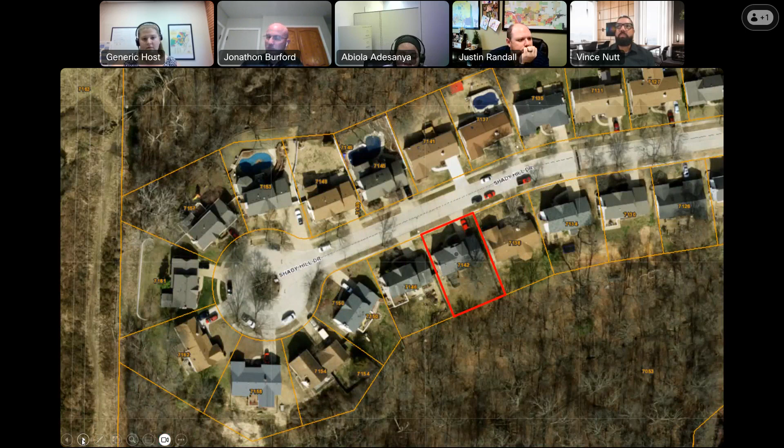Jeremy, please state your first and last name for the record, and then feel free to present to the board. Good afternoon, everyone. My name is Jeremy Durham. Thank you for the opportunity to present today. So you can see an overhead aerial view of my house. It doesn't give you a tremendous view of what's going on, but we're requesting this variance because we're trying to do a more permanent fix to a considerable amount of erosion damage that has happened.

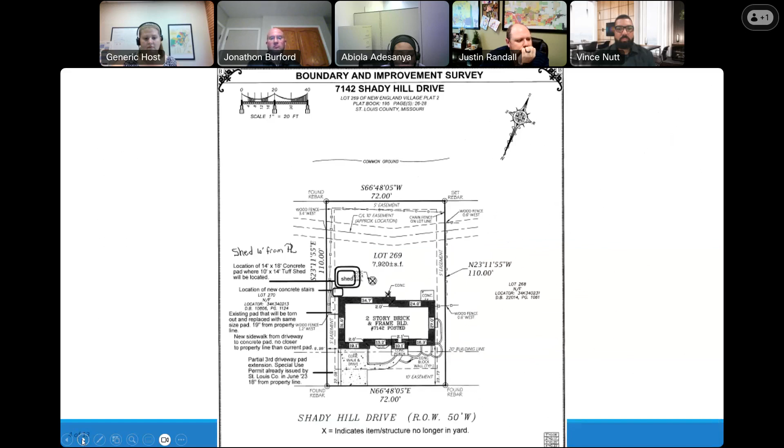I'm under the impression that you have been given copies of the photographs I submitted with all of the erosion damage, and our temporary attempt at fixes with the keystone wall. The concrete slab that currently sits on the side of our house has 5 inches of drop and has started sliding to the back of the house.

So that is all going to be replaced with a same size shed, same size pad. Off of that pad, instead of the wooden steps that you can see the remnants of what is left from the erosion, we're going to be doing poured concrete steps. So there will be a footing poured around the perimeter of the steps, which will come down the edge of the foundation.

There will be a roughly 5.5 by 5.5 foot landing at the top of those steps that will join with that concrete slab you're seeing right now—the new one, obviously not that one, because that's going to get torn out and replaced. It will all be compact with rebar and gravel to pour the steps. And you can see a good shot there of all of our attempts to try and stave off that erosion.

Really, it's kind of cut and dried. It's become dangerous for us to even enter our backyard from that side, and we're just looking to do a more permanent, albeit very expensive, fix to remedy this 19 years worth of erosion damage.

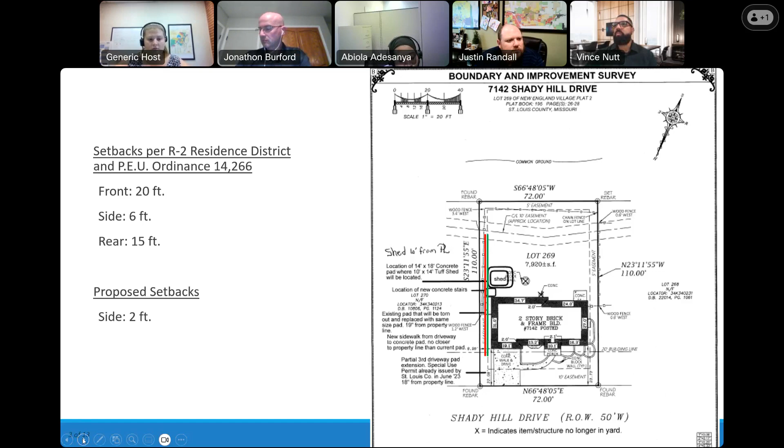Gotcha, perfect. All right, I don't have any further questions. Vince, do you have anything? No further questions. Okay, at this time I will ask if there is anybody in the meeting that would like to speak for or against the proposed variance. I don't see any hands, so at this time I'm going to mute the petitioner so the board can take a vote.

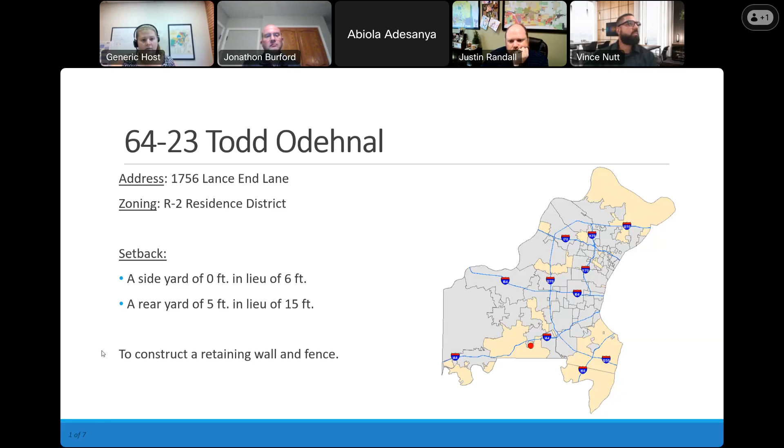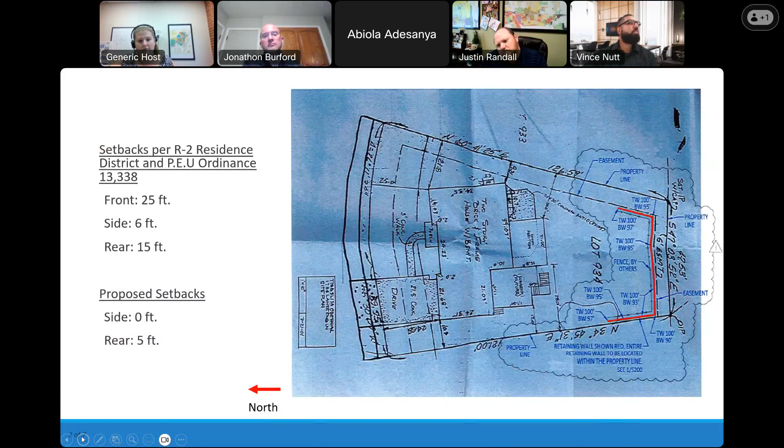Hi, my name is Ty Malone. I'm the contractor for this job. In all reality, all we're trying to do is fix this failing wall that's already there. We're just trying to tear it down and put it back in the exact same spot that it's sitting. It's just kind of simple - we're not trying to change anything than what's already existing there. Didn't know we were going to run into this issue when we first looked at it. Just trying to figure out how to move forward with this as best as possible.

As you can see, the wall runs down the back there. If you go to the other corner, it's already separating, so it is failing. It was not put together right. Whoever built it first put a lot of corner seams straight on top of each other, didn't interlock those bricks to keep them secure. So we're wanting to tear that down, otherwise it's going to end up falling down. Just trying to prevent any further damage to any other property, his property, and then just reestablish the fence that was on top of that wall.

Okay, thank you for that. Vince, do you have any questions of the applicant? We could zoom in onto the survey. I think there was a survey attached, site plan. Just wanted to confirm, looks like we were in line with an easement, just to assure. Yeah, just on the inside line of the easement. And we just wanted to ensure that we are proposing staying within side of that easement barrier.

Yes, sir. Location. Okay. And next, for staff, is there any previous variance that is recorded for this? I would not be able to attest to that. Can you look that up quickly? Thank you, hold. Abby. Pending the answer to that, Justin, I have no other questions.

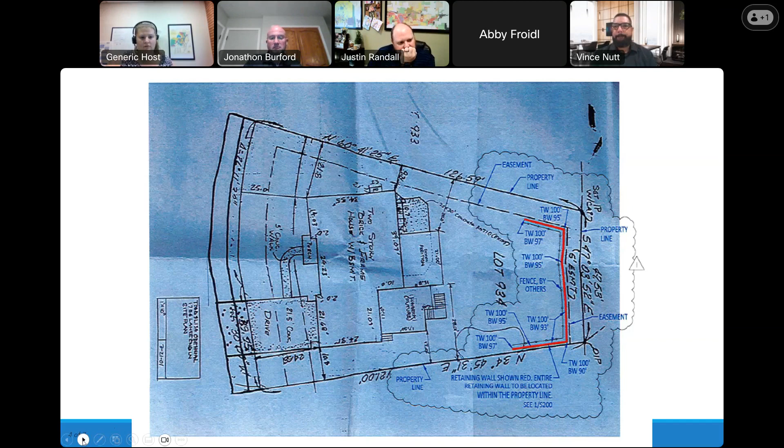65-23, Kathleen Altoff, is a request for an exception to the rear yard regulations for the purpose of constructing a deck at 1314 Summers End Drive, maintaining a rear yard of 6 feet in lieu of 15 feet as required by the R3 Residence District regulations of the St. Louis County Zoning Ordinance and PEU Ordinance 14,550.

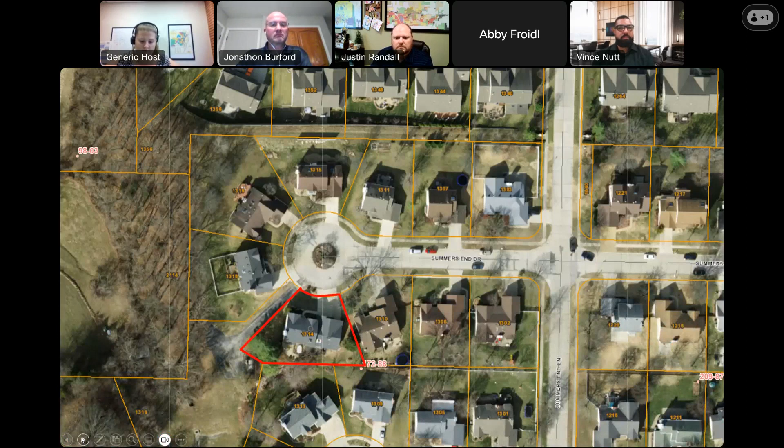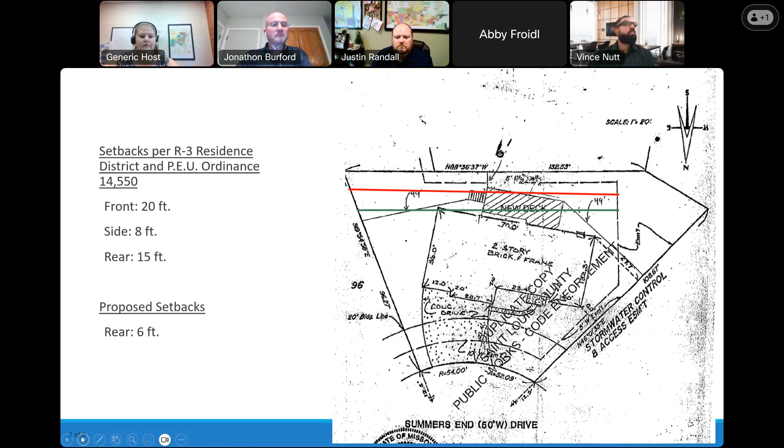Hi, Kathy Altoff. I'm requesting a variance to replace my current deck. It's going to be basically the same size, a little bit smaller. The reason is because it's falling apart—I have some support structures underneath it, and the understructure is about 32, 33 years old. That's all.

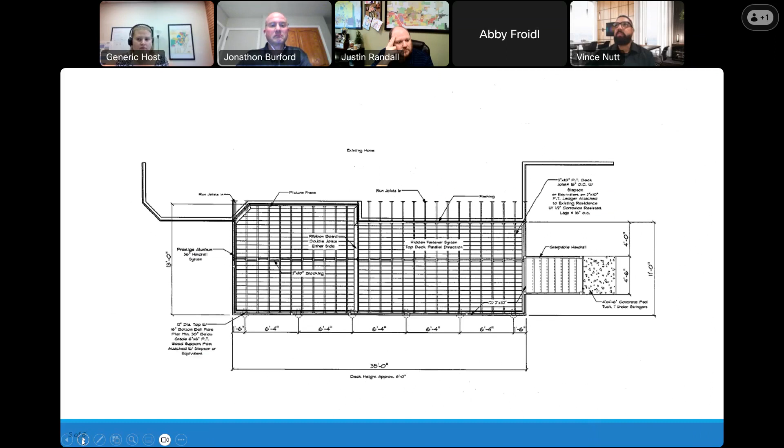All right, thank you. Vince, do you have any questions? So just wanted to confirm, this is a structural concrete pad deck, or is this a wood deck? It's a proposed wood deck. Okay.

No further questions. And I just want to confirm that the size is the same. It's not getting any larger, correct? No, correct. Thank you.

Okay, at this time, is there anyone in the meeting that would wish to speak on 65-23, either for or against? I don't see any hands, so at this time, I'm going to mute the petitioner and their representative so the board can take a vote.

This is 65-23. In the case of 65-23, I propose to make a motion in favor of variance for the newly configured deck to be within the same perimeter of the existing deck, knowing that the hardship is that we are staying within the same confines of the original deck footing. I will second that motion.

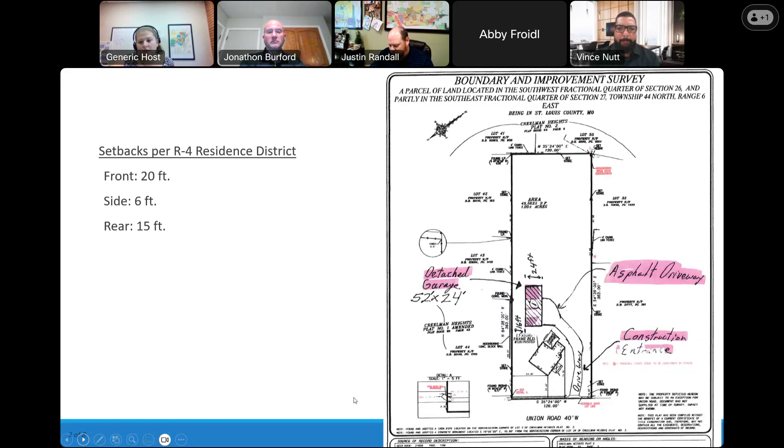Okay, so paving. And actually there was a structure in the area of my proposed structure in the past. This house used to have a bunch of outbuildings and barns that are obviously no longer there.

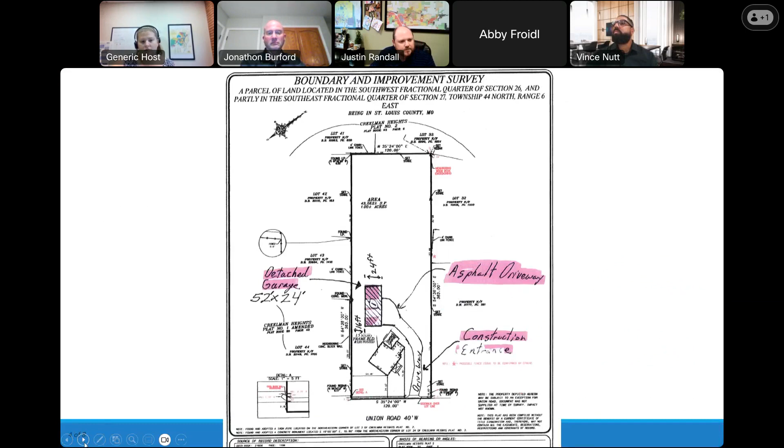Okay, thank you, Chris. Vince, do you have any other questions for Chris? No additional questions. All right, thank you.

At this time, I'm going to open it up if there's anyone in the meeting that would like to speak for or against petition 66-23. I don't see any hands, so at this time I've muted the petitioner so the board can take a vote. This is 66-23.

I always struggle with these. I find it difficult to find the hardship to allow a structure to be larger than what the code allows.

I don't know, Vince, do you have any thoughts on the hardship in this particular case? I struggle with it as well. The hardship on this one being that it is an older home - the lot size is what stands out to me.

1,248 square feet - it always gives me a little bit of pause when it's the same size as the house. Looking at the site plan, I didn't see that there were additional oversized garages in that area, unless I just missed it on the site map overhead aerial.

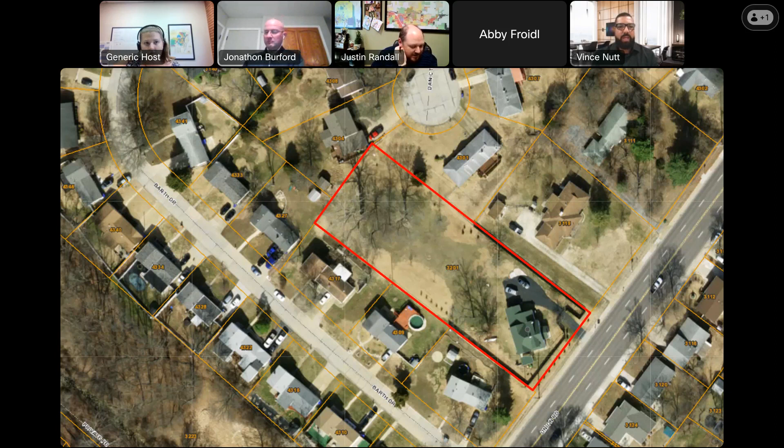I'll second that motion. All those in favor signify with an aye. Aye. Aye. All those opposed, nay. The ayes have it, and the staff will send out the paperwork approving the variance.

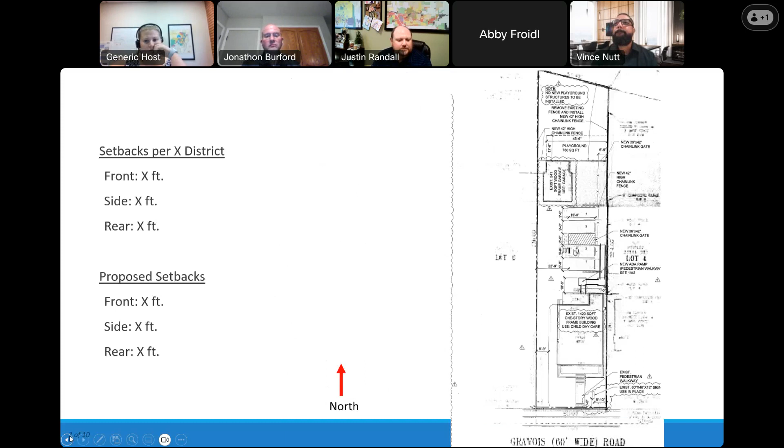Exactly, yes. Well, yeah, everyone, it's going to be crowded, there's only so much space on this piece of property. It will be crowded. They'll have to back out, back next to the porch, turn around and go down the drive aisle toward Gravois. There might be some people who use the space on Gravois in front of the building, take the front sidewalk and go up the front steps.

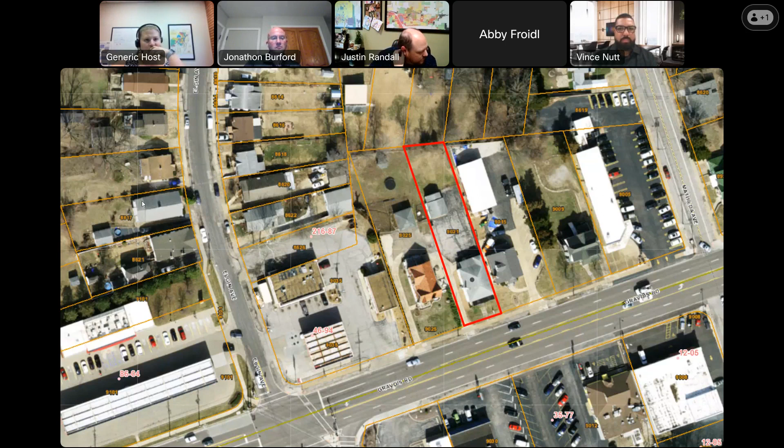It's not like they're going to park there long-term, it's just drop-off—picking up kids and taking them inside so parents can leave right away. If anyone is parking there, it's because we're having a meeting with them, which would take more time, but I won't have four parents parked at the same time for more than three minutes, and three minutes is already too much. All parents drop off and pick up on different schedules because I have different ages—infants, toddlers, and older kids. So when they go to the driveway, they can turn around without backing up; they have enough space to turn around and leave from the same driveway.

I think it's important for us to remember the variance request we're looking at is whether or not 8 feet 9 inches for the access is appropriate. Even though I have some of that same concern about what happens back there that technically meets county code, we need to focus on whether we're comfortable with 8 feet 9 inches on that one section of the drive.

Is there a site plan note on this? Sorry, this is under site plan review, as Abby mentioned, so staff is currently looking at this.

I was just noting that there is 22 feet beyond the building in the drive aisle and parking space, which is wide enough for two-way traffic for sure. So there is some space there to turn around.

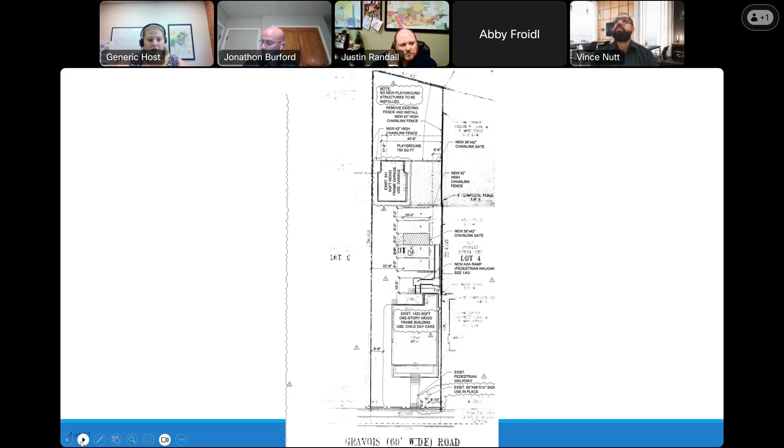We'll move this through the paperwork process, and good luck to you guys as you move through the process. We never had anybody from 68-23 join the call, so we'll get in touch with their representative and the property owner, and you may see them back at the next meeting. We'll see what comes of that.